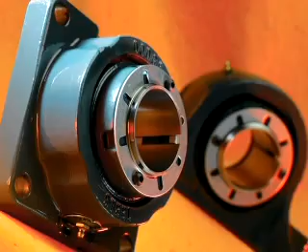Dodge Imperial bearings are adapter mount spherical roller bearings which incorporate a unique mounting and dismounting method. This revolutionary method is exclusive to the Dodge Imperial bearings and has been patented by Baldor.

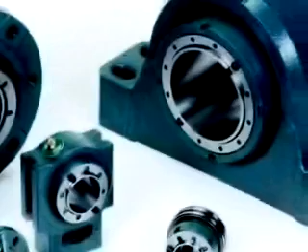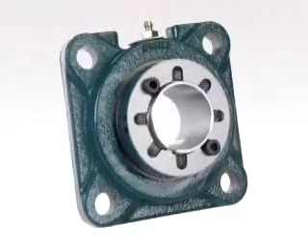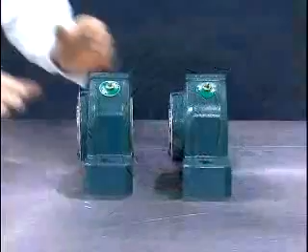The different housing configurations available include 2-bolt pillow blocks, 4-bolt pillow blocks, 4-bolt flange units, piloted flange bearings, wide slot take-up bearings, and the split cap ISAF pillow block. All of these housing variations are available in expansion and non-expansion designs.

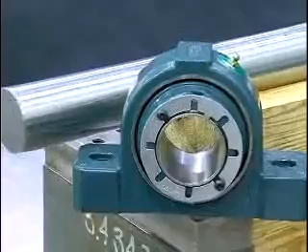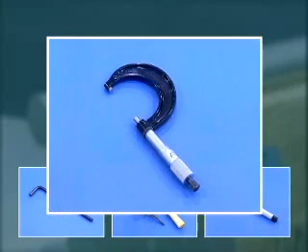We'll be mounting a 2 7/16 inch pillow block Imperial bearing. The tools required to mount the Imperial bearings include an Allen wrench, drift, hammer, marker, a micrometer, straight edge, and a torque wrench to tighten the base bolts once the bearing is mounted.

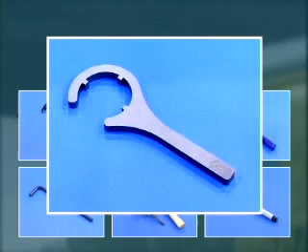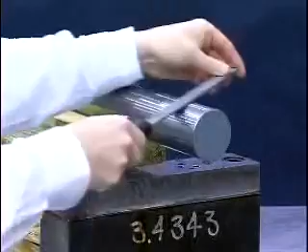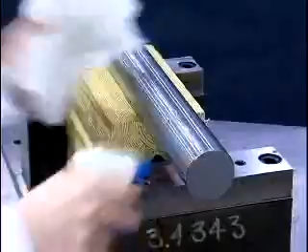Prior to bearing installation, inspect the shaft to ensure that it's smooth, straight, and clean. If a nick is found, remove the raised area with a file. Then use an emery cloth, sandpaper, or Scotch-Brite pad to clean corrosion and fine nicks from the shaft. Apply a thin coating of oil or other rust inhibitor to the mounting area of the shaft.

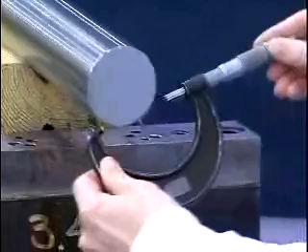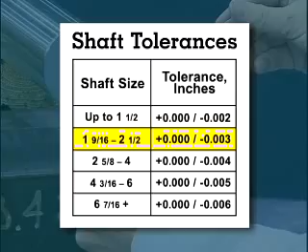Now ensure that the shaft is within commercial shaft tolerances. Due to our adapter mount design, standard commercial shafting tolerances can be used. This chart reflects the recommended tolerances. We'll be mounting a 2 7/16 inch Imperial bearing, which requires a shaft diameter of 2.4375 inches, plus 0, minus 0.003 of an inch.

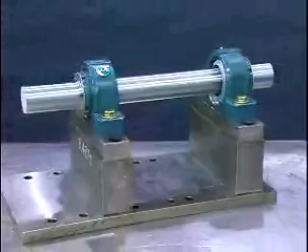An instruction manual is supplied with each adapter mounted bearing and should be read prior to mounting. All applications require a 2-bearing system to operate properly. The Imperial product line is offered in both fixed and float or expansion. The fixed bearing should always be mounted first and is typically mounted on the drive side of the application. The float or expansion bearing is mounted last for positioning purposes.

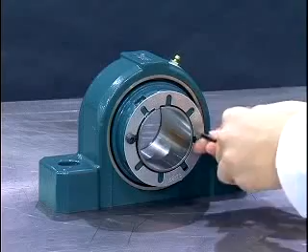The bearing is equipped with a lock plate which is secured to the face of the lock nut. Remove the button head cap screws using the Allen wrench. Remove the lock plate and set it aside. We'll reinstall the lock plate after the bearing is mounted.

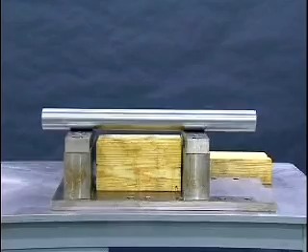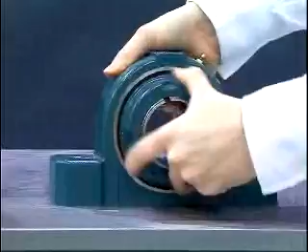All adapter mount bearings require load to be removed during mounting to ease bearing drive up and to minimize required mounting force. This can be done with a sling, jacks, or in our case using supports. While holding the adapter sleeve, rotate the lock nut counterclockwise 1 to 2 turns. This will allow the adapter to fully expand.

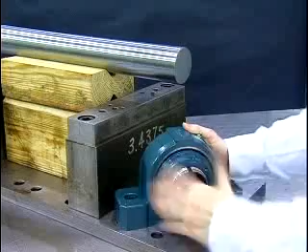Slide the bearing to the desired position on the shaft. If the bearing does not slide onto the shaft easily, loosen the lock nut another 1 to 2 turns and repeat the process.

Now, the bearing lock nut needs to be tightened to its 0 reference point or starting position. The 0 reference point is defined as the point when the clearance between the adapter sleeve, shaft, and bearing bore is removed, and all mating surfaces are in metal-to-metal contact. This is achieved by tightening the lock nut clockwise using both hands until the lock nut can no longer be rotated by hand.

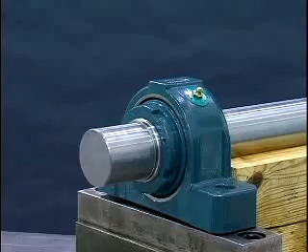As a test, to ensure the 0 reference point has been reached, tap on the OD of the nut with a hammer and attempt to rotate the nut using both hands. If the nut does rotate, the 0 reference point has not been reached. Repeat this step. If the nut will not rotate, then the 0 reference point has been reached.

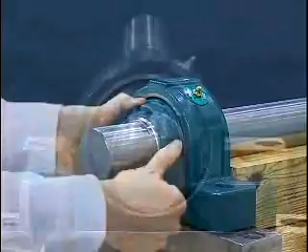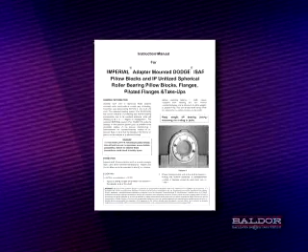Once the 0 reference point is achieved, mark a line on the face of the lock nut and adapter sleeve. It is good practice to mark the lock nut face in line with the slot on the adapter sleeve. Next, determine the appropriate amount of lock nut rotation required for mounting.

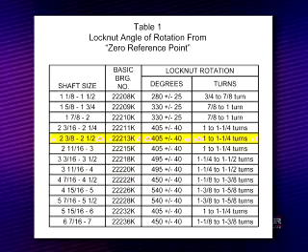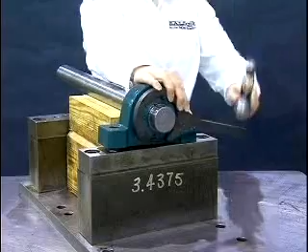This information is shown in the instruction manual supplied with the bearings. In the case of the 2 7/16 inch Imperial bearing, the rotation of the lock nut from zero position is 1 to 1 1/4 turn. Using a drift or Imperial impact spanner and hammer, rotate the lock nut 1 to 1 1/4 rotation from the marked zero reference point. Once the desired rotation is achieved, the bearing is mounted.

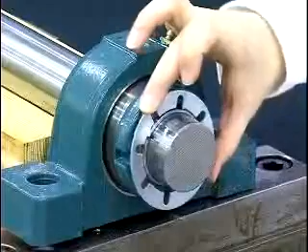Find a lock nut hole that aligns with the lock plate hole or slot. If the closest lock nut hole is beyond a lock plate hole, mark the adapter at the next closest lock plate hole. Tighten, not loosen, the lock nut to meet with the lock plate hole or slot.

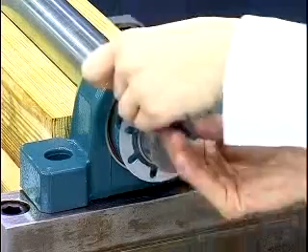Next, put the lock plate on. Then insert the lock washer and button head cap screws through the lock plate into the lock nut holes. The fixed bearing has now been properly mounted to the shaft. To keep the housing in position, loosely install the base bolts.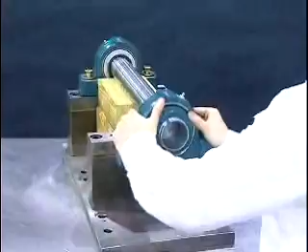We'll now mount the float or expansion bearing. The float or expansion is mounted the same way as the fixed bearing. The only difference is positioning the housing with respect to the bearing to accommodate shaft growth due to thermal expansion and the movement of the bearing during installation. Follow the same mounting procedures as shown in the previous segment.

Once the bearing has been properly mounted, it can now be attached to the mounting structure. Insert the base bolts into the float bearing, making sure the float housing has been shifted in the correct direction so it will accommodate shaft thermal growth. Remove shaft support.

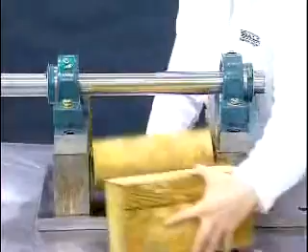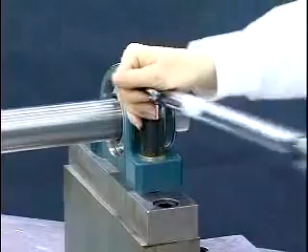Next, make sure that the bearing housings are aligned by the use of a straight edge or laser. Torque the mounting bolts to their required torque values. The bearing assembly has now been properly mounted.

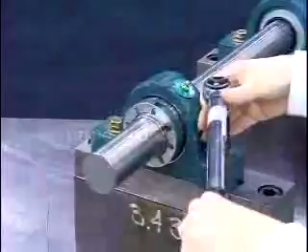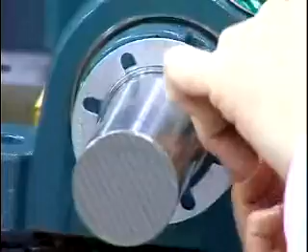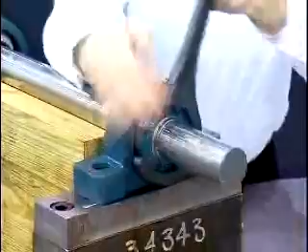To dismount the bearing, first loosen the base bolts. Now remove the load. Next, remove the button head cap screws and the lock plate. Now begin to rotate the lock nut counterclockwise using a drift or the Imperial impact spanner, wrench, and hammer. Continue to drive the lock nut counterclockwise until the bearing is released from the shaft. The bearing has now been properly dismounted.

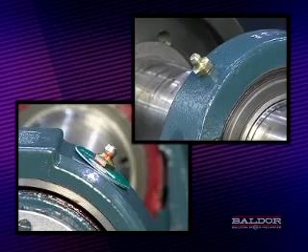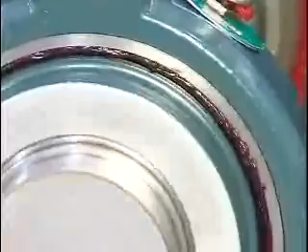Grease fittings are supplied for each bearing for relubrication purposes. The bearings are pre-lubricated at the factory with lithium-based grease and should be relubricated with compatible grease. The standard grease fill out of the box is 30 to 40% full. Due to various operating conditions such as speed, temperature, and contamination levels, relubrication intervals vary. The instruction manual should be used as a reference guide.

If it's safe to do so, bearings should be relubricated while in operation to equally distribute grease throughout the bearing and minimize the temperature rise which may occur during relubrication. A good rule of thumb is to slowly add grease until clean grease is seen purging past the bearing seal. Imperial bearing seals are designed to purge excess grease from the bearing as the internal bearing pressure increases.

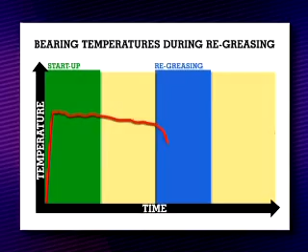There will be a temperature rise which will be indicated by the aid of a thermocouple inserted in the bearing housing. As the excess grease and remaining grease is channeled and distributed throughout the bearing, the temperature will decrease and stabilize. We have accomplished two very important requirements to achieving long bearing life. First, we've introduced clean grease to the internal contacting surfaces of the bearing, which help to prevent bearing wear. Second, we've purged contaminated and deteriorated grease from the bearing.

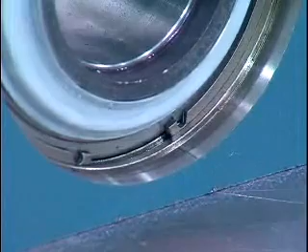Dodge Imperial bearings can be converted from expansion to non-expansion and vice versa. Simply move the snap ring on the back side of the housing from the outside groove to the inside groove to switch from expansion to non-expansion. Do the opposite to convert from non-expansion to expansion.

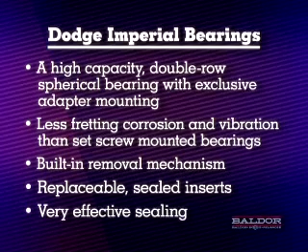As you have seen, Dodge Imperial bearings offer you a high-capacity double-row spherical bearing with exclusive adapter mounting, less fretting, corrosion, and vibration than set screw-mounted bearings, built-in removal mechanism, replaceable sealed inserts, and very effective sealing. Remember, if your bore sizes are 8 inches and larger, use the Dodge Hydraulic ISAF with its revolutionary hydraulic mounting and dismounting system.